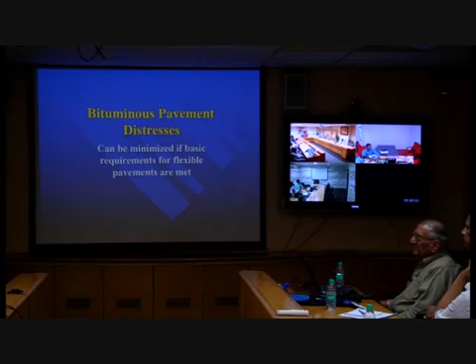You guys in NHAI won't be on the job if you have roads like this one. But today we do have pavements, and that's why we are going to discuss the distresses in bituminous pavement. Bituminous pavement distresses can be minimized if basic requirements for flexible pavements are met.

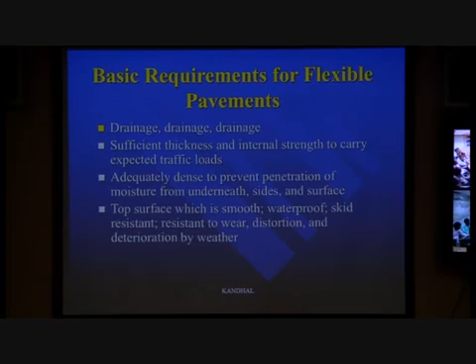And these are the basics. We are saying that bituminous pavement distresses can be minimized if basic requirements for flexible pavements are met. Many times our highway engineers say that three things are important for good performance of pavements, and those three things are drainage, drainage, drainage. That means we cannot overemphasize the role of drainage in the performance.

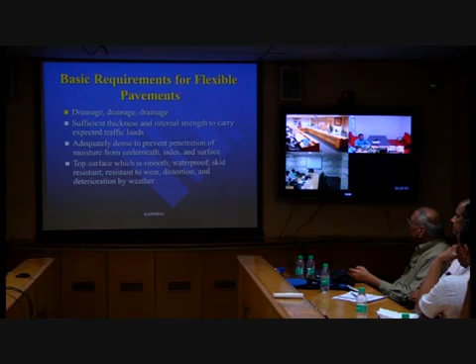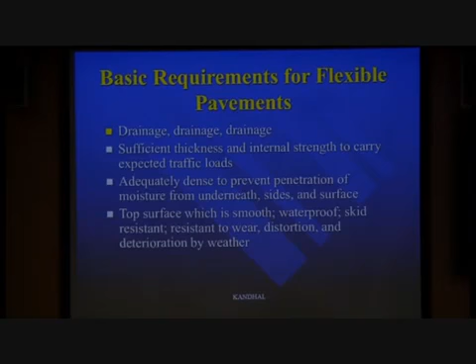The second point is sufficient thickness and internal strength to carry the expected traffic load. This means we've got to do a good pavement thickness design for the load to minimize these kinds of problems, and the internal strength of the mix should be okay. So the mix should have adequate stability and be very strong.

The third thing is adequately dense to prevent penetration of moisture from underneath, sides and surface. In other words, your bituminous mix should be very dense. Now that kind of rules out BM, bituminous macadam. You cannot use semi-dense SDBC because that's semi-dense. And there are many others.

You cannot use DBM grading 1. DBM grading 1 takes in water - I've seen that - it fails prematurely, so it's not sufficiently dense. So you've got to use DBM grading 2 only. So the third point is very important. That rules out all these bad mixes from our books, but they are still on our books.

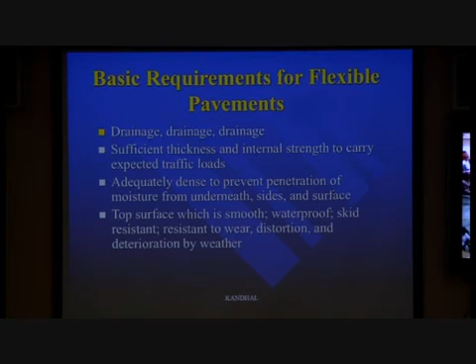And the last point is the top surface should be smooth, waterproof, skid resistant, resistant to wear, distortion and deterioration by weather. And I think that's all common sense.

We understand that. These are the general causes of bituminous pavement distresses: poor quality of materials and construction. And that's what we've talked about for the last 2 days - just to make sure that we have good quality materials and good quality construction.

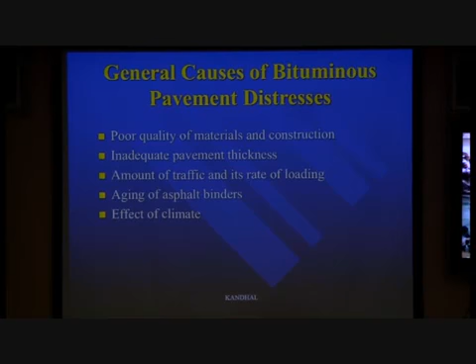Inadequate pavement thickness, that's the same point we discussed in the last slide. Amount of traffic and its rate of loading. Rate of loading means your mix might be okay for fast traffic, but sometimes near the stoplight or when trucks are going very slow on a steep grade, we might have some rutting problem.

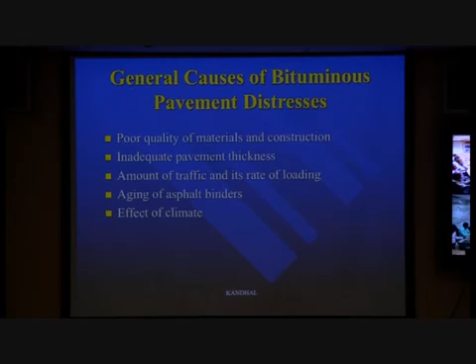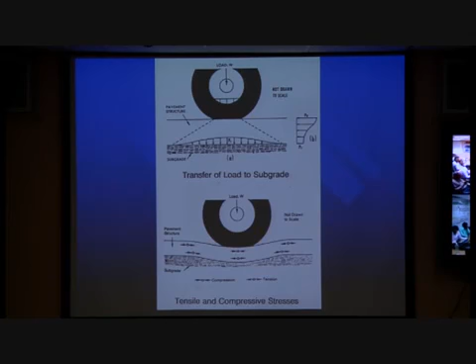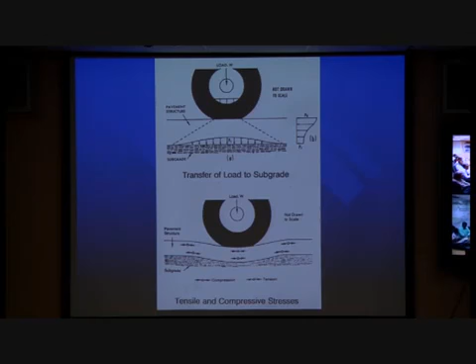And then if you go to the right side, just where the surface is kind of rising, we have a reversal of stresses. On the top we have tension, and at the bottom we have compression. It's a very simplified thing, but the main idea is that at a particular spot we do have a reversal of stresses - compression, then tension, then compression, then tension - and that is very much detrimental to the performance of the pavement.

Now we talk about the typical distresses in bituminous pavement, categorized by distress mode. It can be fracture, and under fracture we can have cracking or spalling. Cracking can be load-associated fatigue cracking, or non-load associated, which is thermal cracking or reflection cracking - we will talk about these individually later - and spalling.

Then the second distress mode is distortion. The material is still there, but it has moved, like permanent deformation, under which we have densification, creep which is rutting and shoving, corrugations, swelling. So the material has distorted in place. And then we also have slippage cracks, which is also a distortion.

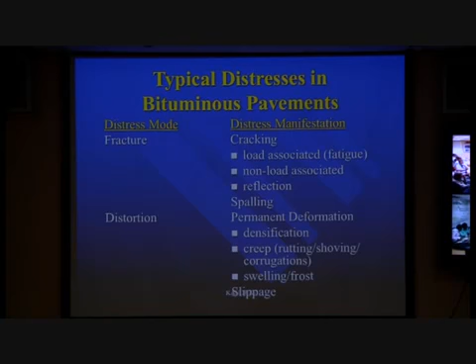And then the third distress mode is disintegration, where the material is simply disintegrating, being destroyed sort of. Under that we have raveling, scaling, stripping, and potholes. And we will discuss these things one at a time.

And there's another distress mode, miscellaneous type, where we have reduced skid resistance. I might build a very good, highly durable pavement, but if it becomes slippery when wet, there can be a lot of accidents. So that's not desirable - that's also a distress sort of. Then riding quality, roughness, is also important.

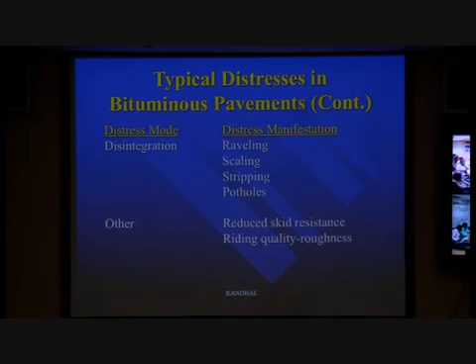So first we talk about the first distress mode, which is cracking of bituminous pavement, and we'll talk about load-associated or fatigue cracking, the first type of cracking. Then we'll talk about thermal cracking and all those.

So this one is the fatigue cracking. It's also called alligator or map cracking, the way it appears on the surface, like alligator skin. This would be caused by loads too heavy for the pavement structure - like we didn't do a good job of pavement thickness design, or there might be overloading and all that. Second, too many repetitions of load more than the design - it's kind of the same as point one.

Inadequate support - the pavement layer or subgrade might be bad. The subgrade might be settling; your asphalt layers might be okay, but the subgrade is settling. Poor drainage, very stiff binder in the surface course - this will occur in the wheel path, and ultimately sometimes potholes will also develop in an advanced stage.

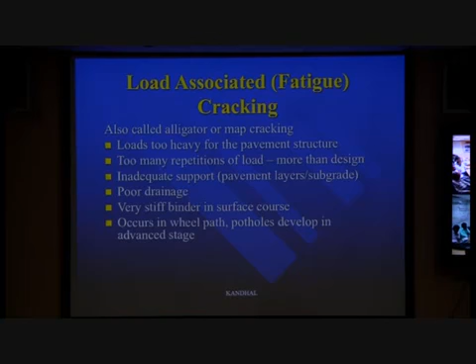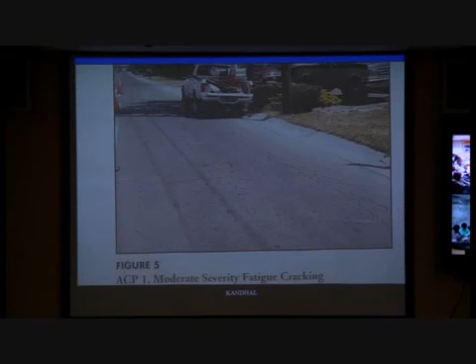And then in the advanced stage, you can see some parallel longitudinal fatigue cracking will occur. So there will be not one but many of them, and then ultimately there are more parallel cracks, then there are cross cracks, and then that's when it starts to look like alligator cracking. This is really in a very advanced stage of fatigue cracking.

And this kind of pavement is just already shot, nothing you can do. Simply putting an overlay on top is not advisable - we've got to do something about the pavement which is completely broken. We might have to go for cold recycling or whatever. There are several ways we can improve that.

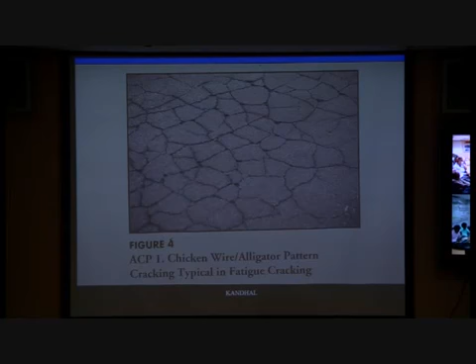And here is a close-up of the fatigue cracking. It's also called, as I said, chicken wire cracking or alligator skin type appearance. And there's one more view of fatigue cracking, very close. So that was the fatigue cracking - it was the load associated. Now we talk about the non-load associated, which is thermal cracking, happens from the temperature.

You may or may not have load. Even if you don't have any load, if you simply built a new pavement that has not even been used by traffic, you can have thermal cracking. This will occur at regular intervals. These are transverse cracks, unlike the fatigue cracking which was longitudinal.

These transverse cracks will happen if the asphalt binder is too stiff at low service temperature. We talked about the first day, that sometimes if the asphalt is very stiff at high temperature with neat bitumen binder, it can also be stiff at low temperature. That's where sometimes these polymer modified bitumens help us.

Second point is rapid chilling of the road surface. If there is a sudden drop in temperature, like you might have in Ladakh or Leh area, the temperature might be like minus 30 degrees Celsius and goes to minus 40 degrees Celsius within one hour. That's rapid chilling, and you will see transverse cracks all over the place, just in that one hour.

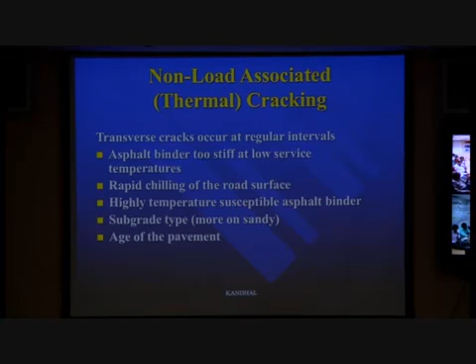The last point is the age of the pavement. As the bitumen binder becomes oxidized, it becomes more and more stiff, and then the pavement is more susceptible to thermal cracking.

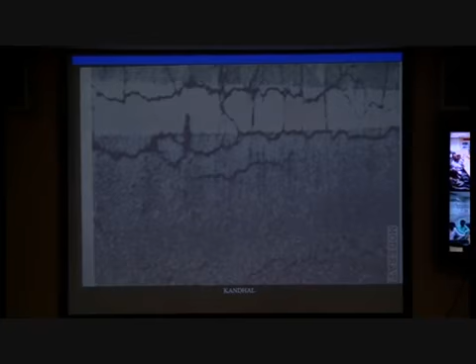Difference in thermal conductivity? Sir, is this a moisture induced effect, because of poor shoulder and water penetration? Why would water penetrate right at the edge of the paint stripe? Well, we have the answer here. Maybe the shoulder, sir - shoulders are higher than the pavement? No, it's in the center. Or improper shoulder connection? No, this marking is in the center of the pavement, the centerline marking, to divide the two lanes.

Well, we got the answer here: when the sun is out, the pavement under the white stripe won't get heated as much as the black surface. So the white surface and the black surface have a different coefficient of expansion and contraction - different thermal conductivity. And because of that differential thermal conductivity, we have this hairline cracking. Now who guessed that? It's just something to think about.

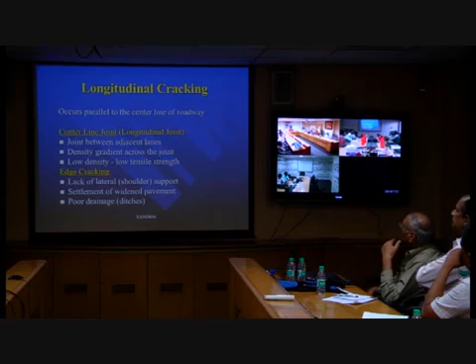Now we also have longitudinal cracking. We talked about fatigue cracking and thermal cracking. Longitudinal cracking occurs parallel to the center line of the roadway, and we have at least two types.

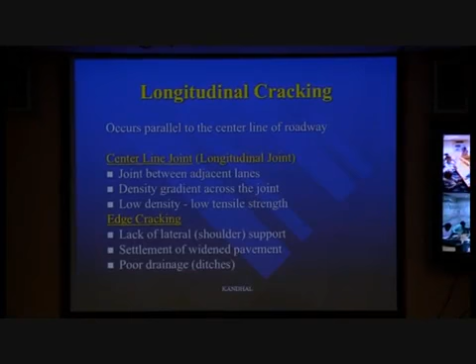One is the centerline joint, which is the longitudinal joint we discussed yesterday, how to construct a good joint. It will occur at that centerline joint. The other one is edge cracking. The centerline joint is a joint between adjacent lanes, as discussed yesterday. One reason it happens, besides poor construction, is that there is a density gradient across the joint.

When I construct the first lane, my edge on the side of the next lane is unconfined. So when I'm trying to roll it, the mix pushes out, and I never get good density at the edge of the first lane. When I lay the adjacent lane, there's confinement, so at the edge of this next lane, the density is higher. So I have a density gradient across the joint.

Because of different density, there is different expansion and contraction, so it behaves differently. Because of that density gradient, the joint opens up, since we have low density on one side. But it can also happen from poor construction of the centerline joint, which we discussed yesterday. The second type would be edge cracking.

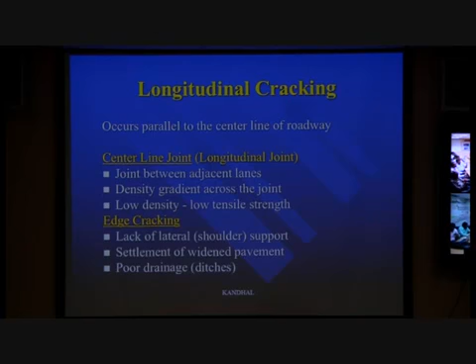If I have a lack of lateral support, there will be edge cracking, which will also be parallel to the edge of the pavement. This can happen due to settlement of widened pavement and poor drainage. When we widen the existing pavement, we have dissimilar material, so that crack always occurs and there's nothing much we can do. It keeps on happening, it's a permanent nuisance sometimes.

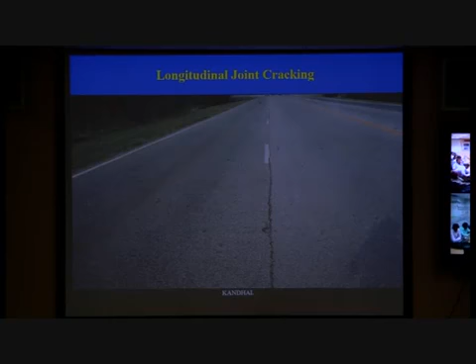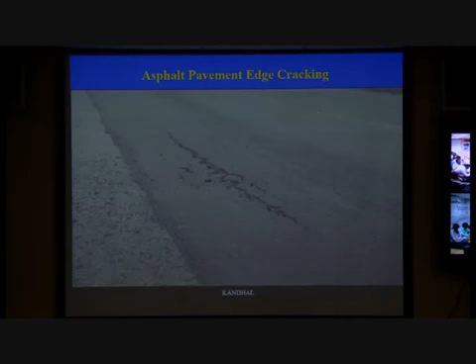Here is the edge cracking. Most likely it happened because the pavement was widened on the left side. What you see as the whitest area on the extreme left is the shoulder. This is not a good picture, but this edge cracking is about 1.5 to 2 feet from the edge due to widening.

We also have block cracking, which means both transverse and longitudinal cracking. Most of the time it happens on low volume roads or parking lots which don't have enough traffic. Our road always needs traffic. Traffic helps the road - I'm not talking about overloaded trucks, but we need some traffic.

If I build two roads side by side, one with traffic opened and another with no traffic for 2 years, you will see block cracking start to happen on the road without traffic. This happens because thixotropic hardening, or structuring, takes place in the bitumen binder due to lack of traffic and heat. In other words, the bitumen is just laying there with no traffic and no heat, and it starts to become stiff. There is apparent stiffness that develops due to structuring, and that's why we have this block cracking.

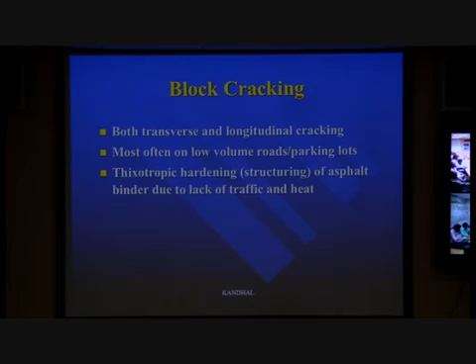You can see this on the driveway of a house, which won't have much traffic - maybe a car goes out and comes back 3-4 times a day. That's it, there's no traffic. So that's where you see this kind of block cracking.

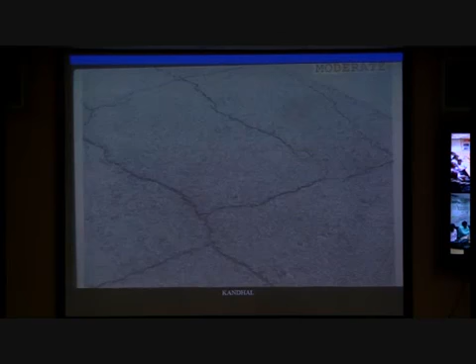You might see this kind of block cracking if you look closely at the shoulder of airfield runways, because there is no traffic on the airfield runway shoulder. Here is a close-up of block cracking in a typical asphalt parking lot.

Then we go on to reflection cracking. These are discontinuities in the underlying layer which propagate through the asphalt surface due to movement of the cracks. This discontinuity might consist of cracks or joints in the underlying concrete pavement, cracks in soil cement base course, or any types of cracks already present in the existing bituminous pavement. If I'm putting an overlay and the existing BC has a lot of cracks, it will reflect through the new BC layer.

This is caused by thermal effects because these cracks and joints are moving. In summertime they expand, so the width of the crack is less. In wintertime it is more. Load is also a factor, when load comes from one side of the crack to the other side.

One thing that strikes me is that now we are promoting soil cement base course, and in the US it was also used many years ago, but after many years it started to haunt because of the cracks. Nothing you can do. Now we are trying to emphasize soil cement again.

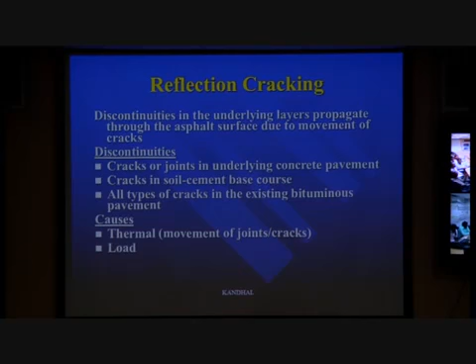Wherever concrete pavement in the US starts to fail, the only thing you can do is put an asphalt overlay on top. Asphalt always comes to the rescue when the concrete pavement fails. One of the failures is like these reflection cracks, the joints get bad.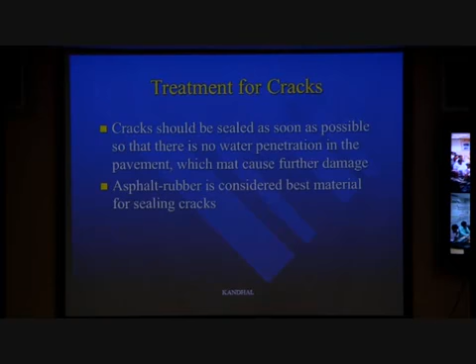So how do we treat these different kinds of cracks? Cracks should be sealed as soon as possible, so there is no water penetration in the pavement, which may cause further damage. Asphalt rubber is considered the best material for sealing cracks. That's pretty common in the US, but I don't see much use of asphalt rubber in India. We'll talk about that in the maintenance lecture, covering what kind of material we should use for cracks.

Now, once we have a reflection crack or thermal crack, sometimes you start to see parallel cracks, and between the parallel cracks you can start to see spalling, like chipping away of the asphalt concrete. In this case it's kind of lost. This could have been avoided if I had sealed the crack when it first appeared. But if I don't do anything, then this kind of spalling or chipping off will take place. Now we'll talk about rutting.

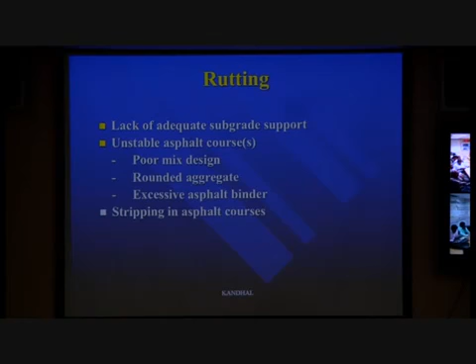Rutting can be due to lack of adequate subgrade support. It can also be an unstable asphalt course itself, which can result from poor mix design, rounded aggregate, excessive asphalt binder, and stripping in the asphalt courses. We'll see some pictures of this.

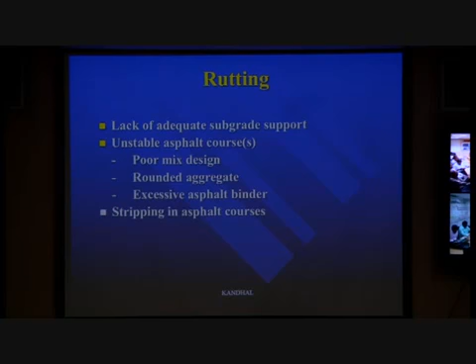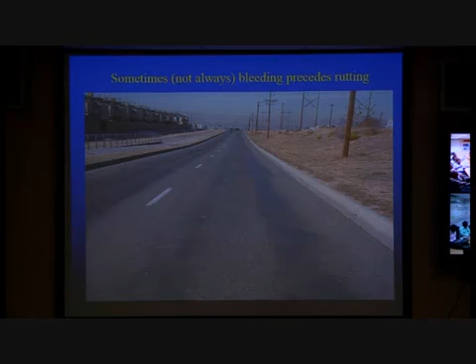But before we talk about rutting in detail, let's talk about bleeding, because sometimes bleeding may or may not lead to rutting. I've seen bleeding take place first and then rutting follows, but it's not necessary that this will happen. So here we have a picture of bleeding, which sometimes, not always, precedes rutting. I have seen this on many of our national highways, and you might have seen it as well. Here's one more example of bleeding.

It can also be flushing. Some people distinguish flushing and bleeding. To me, flushing is just like the start of bleeding, like you see a sheen of bitumen on the surface, and sometimes that sheen can wear off and you are okay. But sometimes it can lead to more bleeding, and then you've got to do something about that.

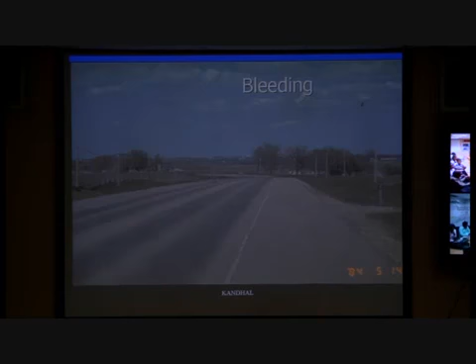So what do we do if I have some bleeding on the national highway from using too much bitumen? What I can do is apply hot sand and roll it during hot weather to blot out extra asphalt binder at the surface. You do it one time.

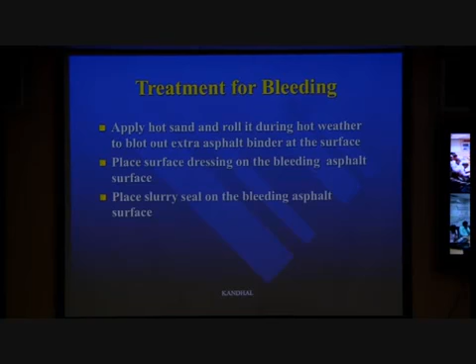If it doesn't work, then you've got to place some surface dressing on the bleeding asphalt surface - that's the chip seal. You cannot do that on national highways, but on other pavements you can use surface dressing, or place slurry seal on the bleeding surface. These might be better than milling off the entire bleeding pavement.

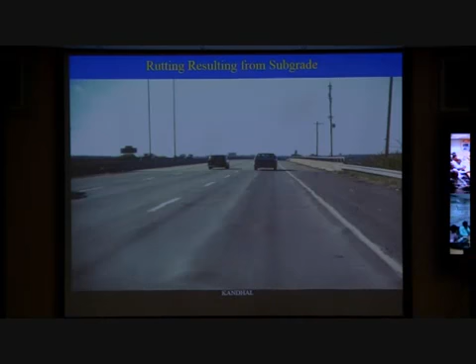So here you see a rutting. The rutting can take place within the asphalt layer, or it can come from the subgrade. In this case, my guess would be that it's coming from the subgrade, because you see a bridge nearby.

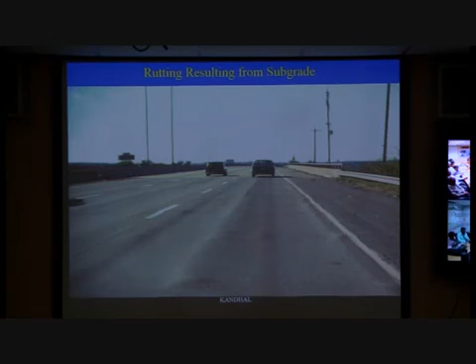Mostly when we construct bridge approaches, we don't do a good job of compaction of the subgrade. Construction is not that good. So that's what happened here - in the approaches which we built last, after everything was finished, most likely it was the subgrade.

Also, when this happens, the rutting is very abrupt, not very smooth. You can see the edges. So most likely it's the subgrade happening.

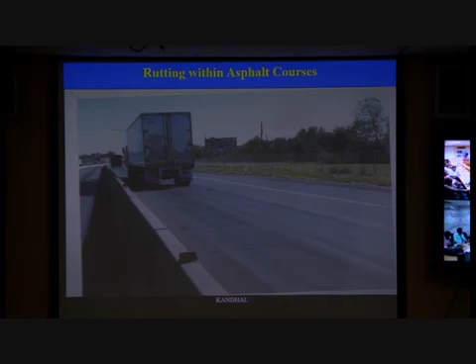Now this one is a picture from the US, and you saw it 2 or 3 times before. This is the rutting within the asphalt courses. It's pretty smooth - you also get a hump on the side of the wheel track. So sometimes by appearance you can figure out what's happening, not always, but sometimes.

Now this is an interstate highway in the US, in the state of Pennsylvania, between Pittsburgh and Philadelphia. It's a 4-lane highway, and 2 lanes were being reconstructed, so all the traffic was on these 2 lanes. What they were doing was, it was a concrete road.

They used 25 millimeter of a leveling course, like a BC grading 2, then 50 millimeter of a DBM grading 2 type binder course, and 40 millimeter of BC. So these 3 layers were put down on concrete.

It carries very heavy traffic. So within 2 or 3 months, there was rutting of about 25 millimeters. Since I was the chief asphalt road engineer, the district engineer called me.

He said, 'What do I do? There's 25 millimeter rutting. Should I remove the BC, or should I remove the BC and DBM?' I said, 'I'm not a god, I cannot tell you anything.'

I need a cross section - you see the black strip on the bottom side. Make 2 saw cuts, about 12 inches apart, cross cut and get the slabs, blocks out of it, and then I will take a look at all these 3 layers, to see where the problem is.

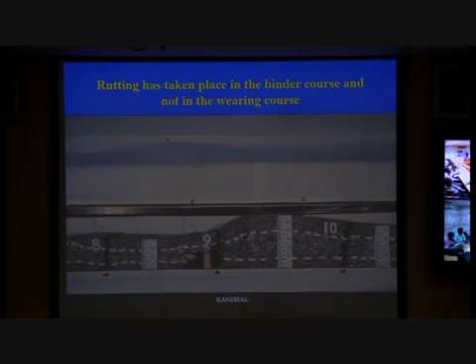Here is a close-up of the rut area and the area which has heaved on the side. You see the number 9, on the right side of number 9 is the heaving, and here you can clearly see that BC is okay. Only the DBM has rutted and is kind of heaving on the side.

If we take a look at the close-up of the DBM, what do you see? What's the problem in the mix here? Why is the DBM rutting? You see the DBM, this second layer from the top - this is the one which caused rutting on this project. You see the particle shape - the DBM has all rounded particles, and that was the main cause.

When we found out why it happened, he said the contractor by mistake got aggregate from Ohio state, which was next door - that's where it was coming from. So he used the wrong stockpile. Anyway, we said it's not our fault, so he had to correct that.

Stability of mix, sir - due to the rounded particles, and also many other factors. We had to change our specification right away after this failure. We started applying 75 blows; before that we only applied 50 blows. And we said no more natural sand. We tightened our specification right away after this big incident. We came up with a heavy-duty asphalt mix design with no sand at all, 75 blows, and put new specifications out of that. So we learned from that.

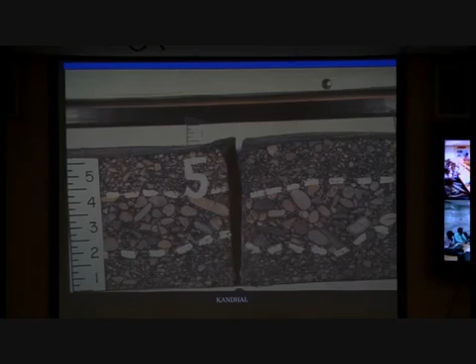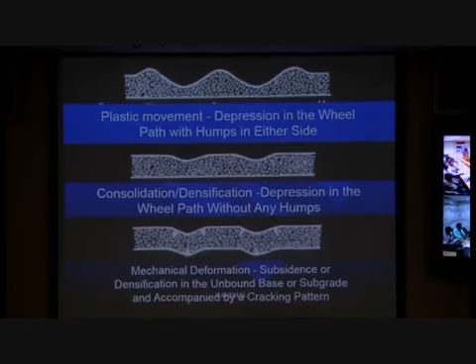Now, when we have rutting, what kind of shape do you see on the surface when you're out there? These are not necessarily all the time, but there are 3 examples here. On top, we have plastic movement depression in the wheel path with humps on either side - this is rutting taking place within the asphalt layers, BC or DBM, like a plastic movement within the asphalt layer, very smooth, with humps on either side of the wheel track. The second one is consolidation or densification depression in the wheel path without any humps.

Now this might happen in your asphalt layer if I didn't do a good compaction job. Well, yesterday we talked about no more than 8% voids. If I'm a lousy contractor, I had like 10-12% air voids, much more than that. Then the traffic will densify that, and it will densify more in the wheel track area. So you might see some slight densification or consolidation, although it's not that much, and you may not notice it's too much anyway. But it can also happen, and you can also call it rutting, although it may not be that deep.

The third example you see in the lower is mostly mechanical deformation, subsidence or densification in the unbound base or subgrade. Your WMM might be a problem, your GSB might be giving a problem, or your subgrade might be giving a problem due to high moisture content, wrong gradation, not good compaction and all that. But here what we will see is that mostly on the surface it's not very smooth, just compare that with the top one, and sometimes it will be accompanied by some cracks at the edges.

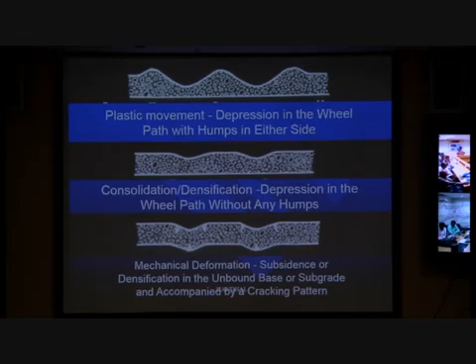These are just rough guidelines, they are not true all the time, but most of the time they will be okay. So the treatment for rutting: first we determine the cause and location of the rutting. If the rutting is coming from the subgrade and you say it's coming from the asphalt layer, then you are not solving the problem. Any layer exhibiting rutting must be removed completely and replaced with a more stable mix. That's just common sense.

Now we go to slippage cracking. These are associated with slippage mechanism. It can be due to poor bond between the surface layer and underlying layer, like if I get a poor bond between BC and DBM, it will happen. It will happen if I got too much tack coat or too little tack coat. It will happen mostly on steep grades and intersections, because that's where the acceleration and braking are taking place, which exert surface traction forces, and they will be U-shape. You can recognize them by U-shape, and I'll show you some pictures of that.

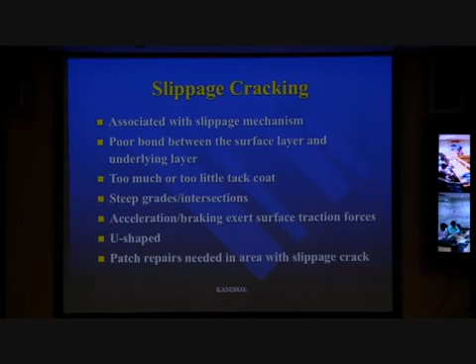There are many causes, but the main thing would be the lack of bond between the BC and DBM, the two asphalt layers, because of too much tack coat or too little tack coat. But the other thing is the traction forces. It will happen on steep grade. If you have an intersection with a traffic light, all of a sudden the light turns red, everybody is stopping, applying brakes. So there is a lot of traction, shear force, horizontal shear force taking place. That will cause the movement, relative movement of BC and DBM. You can say that might be the main cause, but especially if you don't have good bond.

Investigating whether it's only due to tack coat -- how do we investigate at this stage, because we don't know. Okay, if you don't have any problem with the slope or wherever people are braking, and it's happening on a horizontal highway, right, then most likely it's the tack coat, lack of tack coat. What I would take as the rough approach is that you try to take a core. Normally, if there's good bond, you get BC and DBM both at the same time, and you have to really make a lot of effort to separate them. If the core comes out very clean, that clearly shows you that either there was no tack coat or too much tack coat, a problem with the tack coat, or when you applied the tack coat, the DBM was dirty.

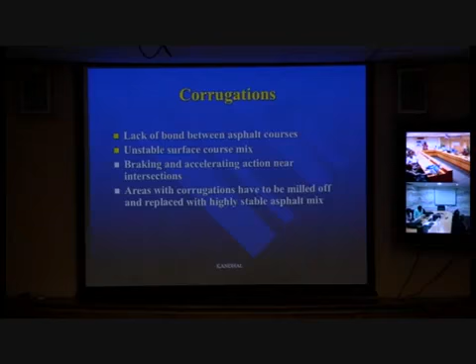They call it checking in the US. Checking is nothing but hairline cracking resulting from the compaction. Corrugations, lack of bond between asphalt courses, happened because of that. Unstable surface course mix. But again, it will happen mostly because of the braking and accelerating action near the intersections.

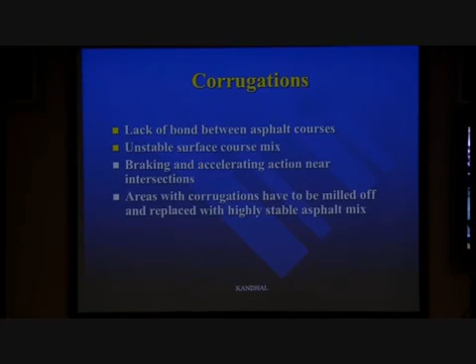Raveling is a progressive disintegration of asphalt surface as a result of dislodgement of aggregate particles in the mix. There is a lack of sufficient cohesion due to low in-place density. It can start right away. If you got like 12% air voids at the time of construction, raveling can start within a year or so. Lack of fines in the asphalt mix matrix, especially in the coarse segregated area, and aging of asphalt binder. The last point is very common because of the oxidation of the bitumen. Raveling can just be initiated.

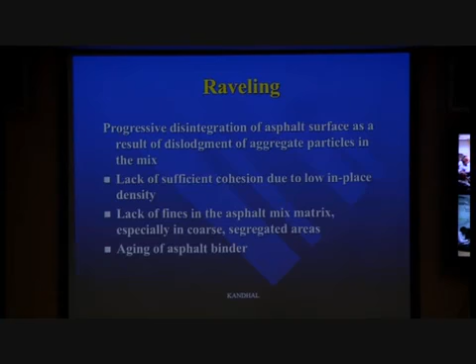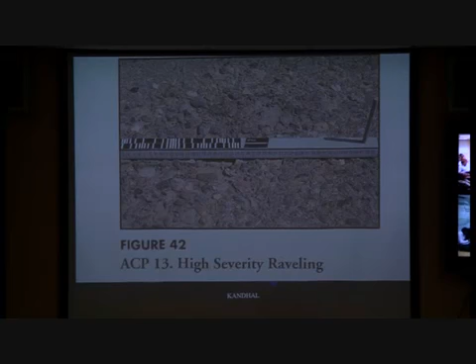Difference between raveling and stripping - both are loss of bitumen only. How do we differentiate raveling and stripping? Stripping will usually take place mostly from the bottom up. It will start usually from the DBM - first the DBM will get stripped, and then the BC will get stripped. Raveling we are talking about only on the BC surface, only surface. But both are loss of bitumen.

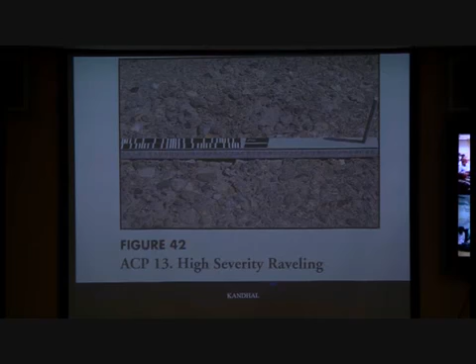Now, the stripping which is called hydraulic scouring is very rare but can take place on the top also. But typical stripping will be starting from the bottom up - you're not able to take a core, it will crumble. We'll show some pictures of that in the next few slides. But this is just a surface thing which we could do some preventive maintenance on.

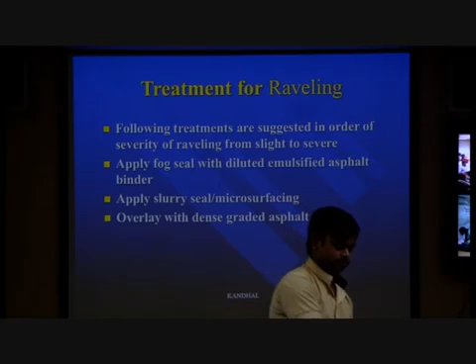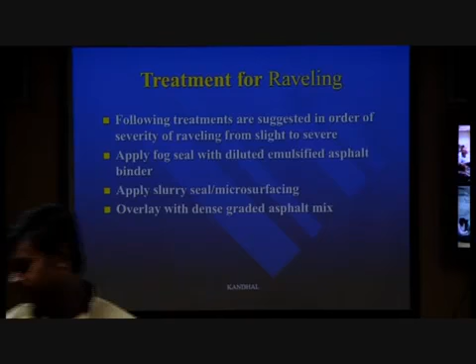We'll discuss in the next lecture what to do - treatment of raveling. Following treatments are suggested in order of severity of raveling, from slight to severe: apply fog seal with diluted emulsified asphalt binder, which we will discuss in the next lecture as well. Apply slurry seal or microsurfacing, or overlay with dense graded asphalt mix, or overlay with BC again.

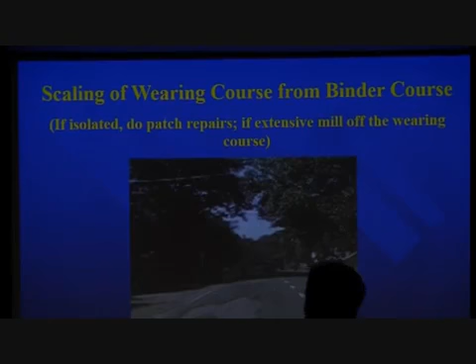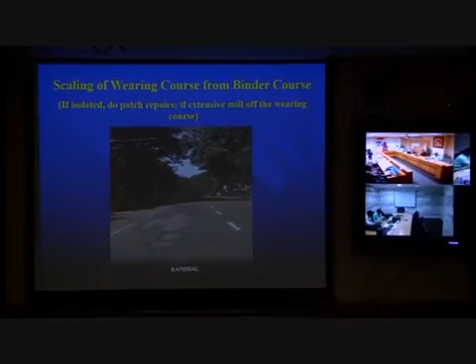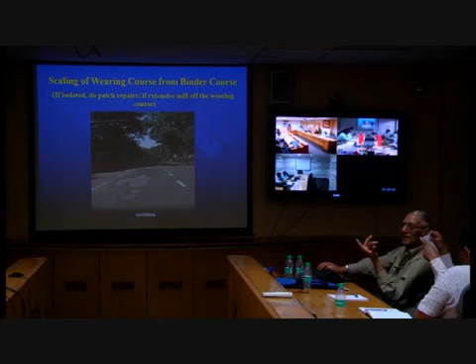This is called scaling of wearing course from binder course. I have seen a lot of scaling in India wherever we have put SDBC on top of BM. BM and SDBC is very common in India because they are very cheap - BM is very cheap, SDBC is only 25 millimeter thick, so everybody does that. BM has a lot of air voids, so it will take up all the water. So water will get filled, stripping will take place, and there will be debonding between the SDBC and the BM. This is a case from Kerala, where SDBC has been scaled off.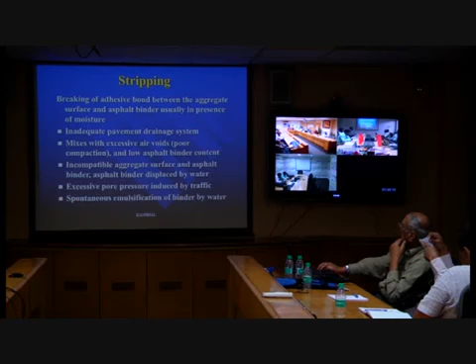Stripping is the breaking of adhesive bond between the aggregate surface and asphalt binder, usually in presence of moisture. It will happen because of inadequate pavement drainage system, mixes with excessive air voids like BM will be one example, or poor compaction or low asphalt binder content. BM has also very high air voids, and also has a lower asphalt binder content.

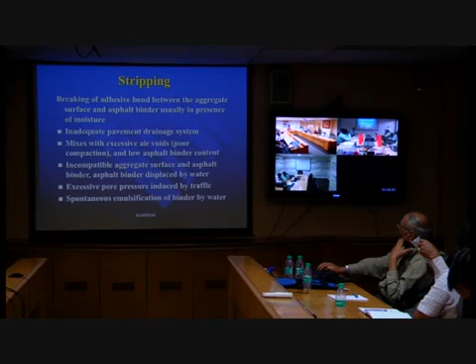Incompatible aggregate surface and asphalt binder displaced by water, excessive pore pressure induced by traffic - if BM is filled with water and traffic is plying on it, then it's creating a lot of pore pressure, so it will also cause stripping. Spontaneous emulsification of binder by water - that sometimes happens on the surface.

One typical, classical stage of stripping, which doesn't happen on all projects, is that first the DBM will start to strip. Somehow the moisture is coming from the bottom up, like from WMM, going up, so first its effect - the DBM will start to strip. Strip means the bitumen film has been stripped off the aggregate, and the aggregate looks like clean aggregate. So what we see on the surface, first stage, is we see some white fines.

We see fines with white color because in the DBM the stripping has taken place. The aggregate has some dust coating, and the moisture will bring out that dust to the top of the surface of the BC. So we see white stains, and then eventually after a few months the bitumen which was stripped off will start to migrate towards the BC surface. It always migrates up because of some moisture vapor pressure or whatever. So then we see some black bleeding spot - you see this white surface here, and the black surface is the bleeding. And then after it starts bleeding, you start to see pothole.

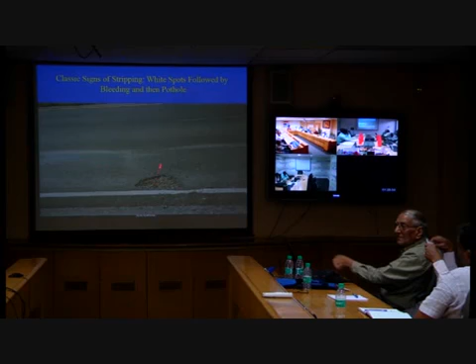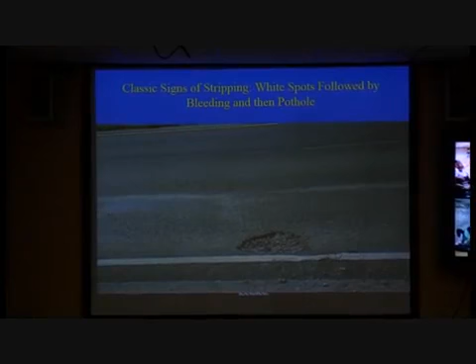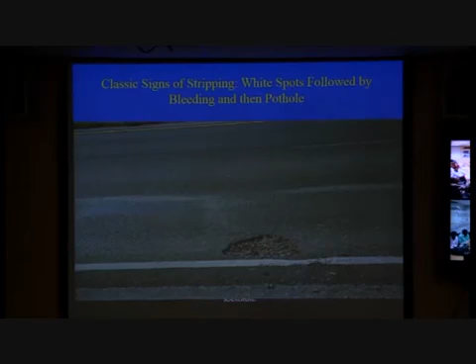These are classical examples of stripping starting from the DBM. I've seen some projects on national highways where the DBM layer is completely more than 50% stripped. You can just take your hand and dig it out. What kind of support will that give you? I've seen the DBM grading where the upper level has 50% stripping, and now the BC is okay, so the pavement doesn't have any support. Stripping is really bad.

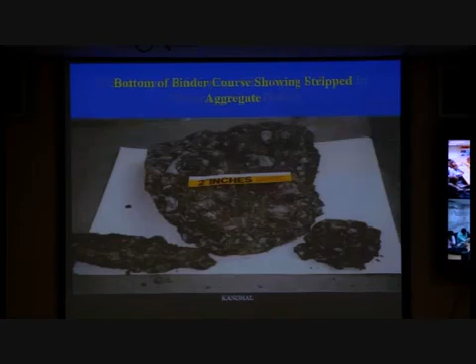That's the bottom of the binder course, the bottom of the DBM, and you can see all these white spots. It's all stripping, as if these particles were never coated. They appear like there was no coating.

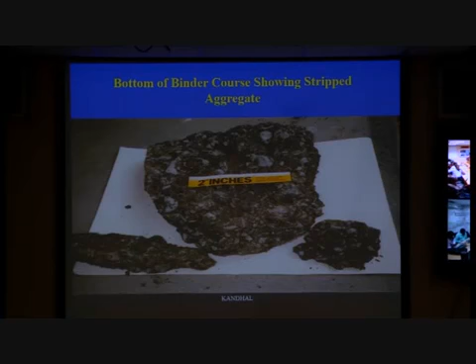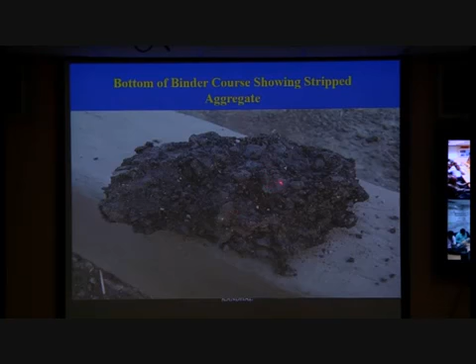Again, an example of stripping. This is a black aggregate, so you don't see it very clearly, but here you can see the bare surface. And then the stripping will lead to potholes.

Then one problem we have is skid resistance. The friction between the tire and road surface is quantified by the friction number, and it's very critical when the surface is wet, making it very slippery. When the surface is dry, skid is not a problem. Only when it rains do we have problems.

That's why we put up signs - I don't know whether we do in India - but in the US we have signs saying 'slippery when wet.' Here we don't have too much rain, only the monsoon, but in the US it rains almost throughout the year.

The causes for low friction number are flushing or bleeding of the asphalt surface, which results in low skid resistance, and inadequate micro texture, which is an aggregate property - aggregates prone to polishing. Many limestones are very much prone to polishing, so they don't have good micro texture. The texture of the aggregate exposed after the bitumen film wears off - that's the micro texture, and it also contributes to skid resistance.

That's why we test the aggregate for skid resistance, as we saw yesterday.

Also, inadequate macro texture - macro texture is a property of the mix, how open the mix is. Stone matrix asphalt, SMA, has good macro texture compared to BC. If you don't have good macro texture, you don't have a drainage channel, which causes hydroplaning at high speed.

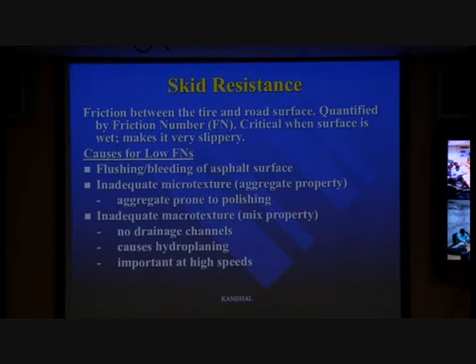The skid number goes down at high speed. The higher the speed, the lower the skid number.

Now this is a picture of a slippery pavement, but it's very difficult to take a good photograph of aggregate which has polished.

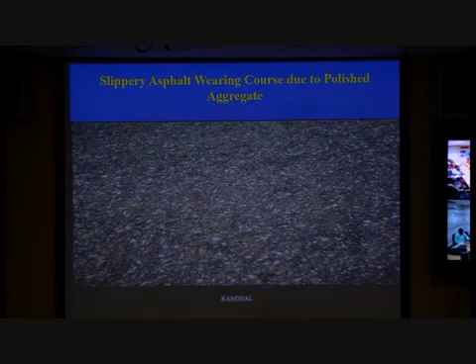The previous photo - we call it stripping or raveling? This one? No, this one is nothing, it's not raveling, it's a polished aggregate. It's not a good picture - it might look like raveling, but it's actually a good BC surface, just with all the aggregates polished. It's very difficult to take a picture showing whether it's polished or not - showing low friction number.

Treatment for bituminous pavement with polished aggregate: whatever treatment we use as an overlay should contain polish-resistant aggregate. You can apply slurry seal or micro surfacing, apply surface dressing, or overlay with new asphalt mix.